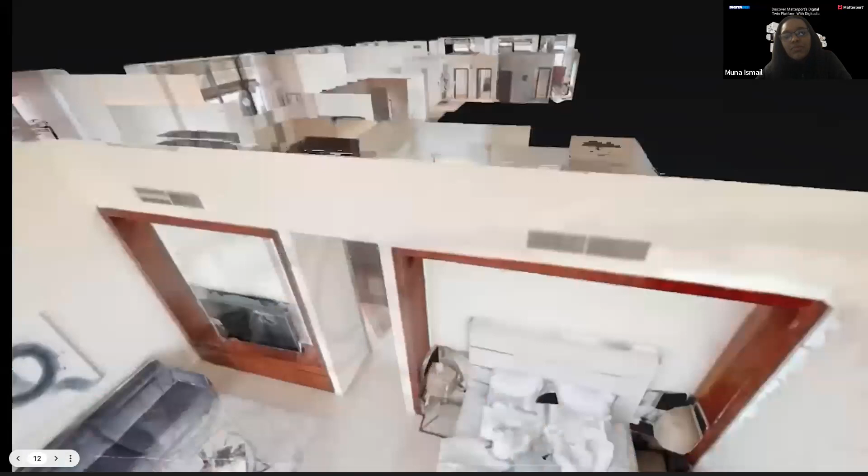Meet Matterport, the market-leading 3D platform that lets anyone turn a physical space into an immersive digital twin. Homes, offices, factories, shops, museums, schools, you name it. Scans are captured from any compatible camera, including the phone in your pocket. This recent innovation is only possible because of Matterport's huge data library. And behind it all is Cortex, our powerful AI and deep learning neural network that automatically stitches together images to construct dimensionally accurate 3D models.

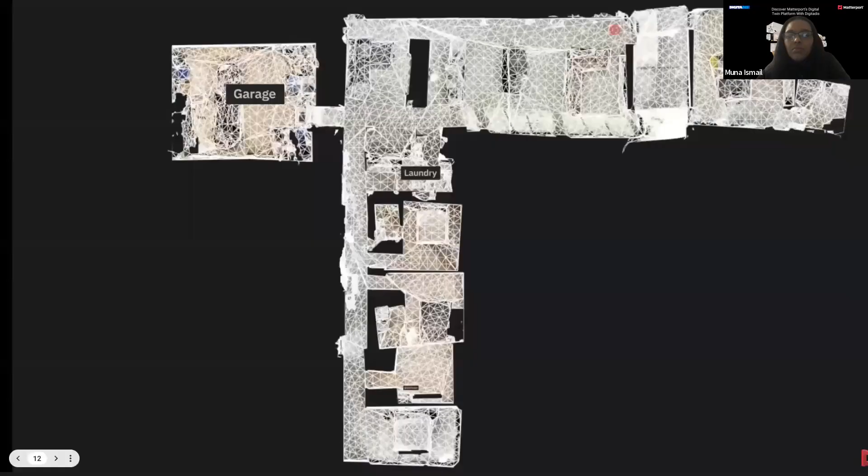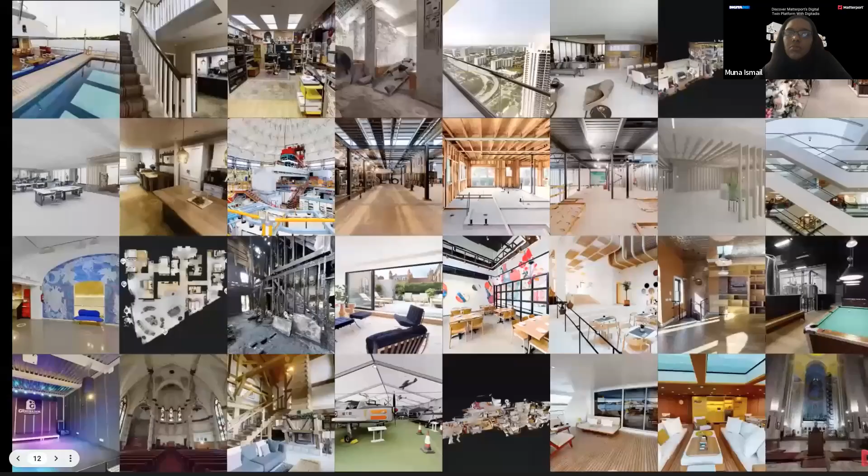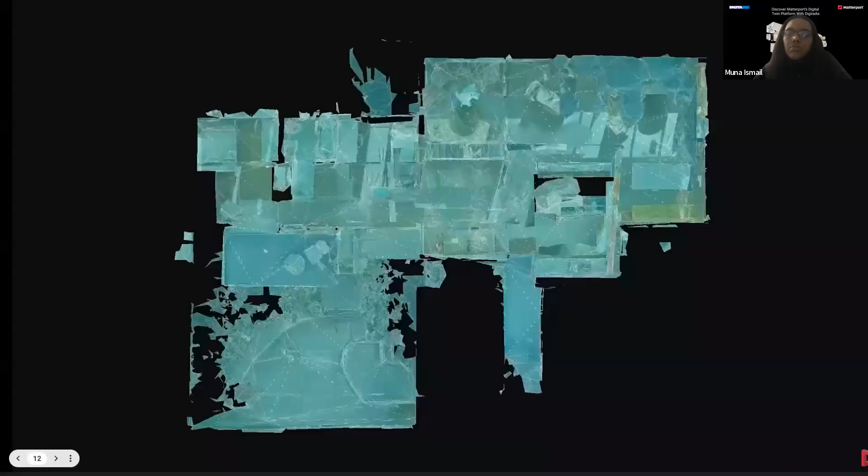Once a digital twin is created, it can be customized with Mattertags, labels, and guided tours, and easily shared with anyone on any device. They can virtually view, collaborate, and engage with 3D spaces. Thousands of companies in over 150 countries use Matterport and have realized unparalleled value. Millions of spaces of every kind have been captured, comprising billions of square feet and 3D data points, resulting in the largest spatial data library in the world. And it gets bigger every day, allowing customers across the property lifecycle to unlock unprecedented spatial data insights and analytics.

Matterport has been digitizing the built world for a decade. Now we're massively scaling towards achieving our mission of making every building and every space more valuable and accessible.

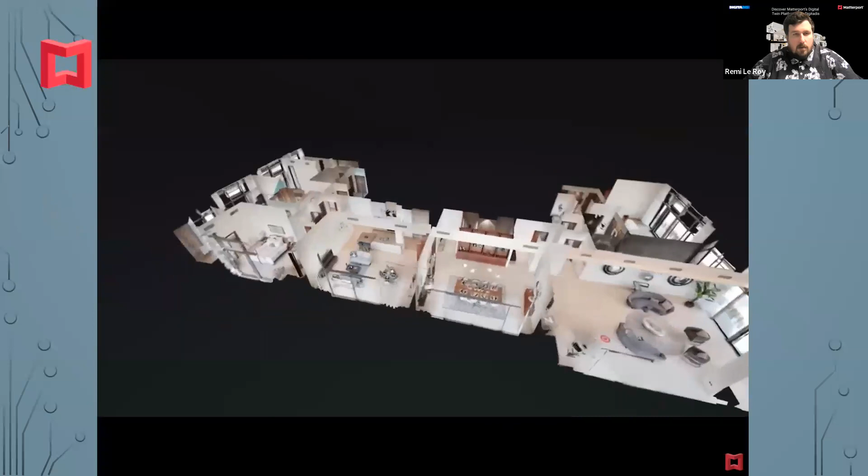Matterport lets anyone turn any space into a digital twin—an accurate and immersive 3D model that can be shared, measured, and customized by you or a team. This is the Matterport Pro 2 camera, the gold standard for professional 3D capture. First, place the camera on a tripod and press the on button in the back to turn your camera on. Use an iOS or Android device to take control of your camera. Go to Settings, Wi-Fi, and find your camera's Wi-Fi. To start scanning, use the Matterport Capture app. Press the Scan button to take your first scan point. You can turn around the camera or hide in another room to avoid appearing in the scan. The layout of the room you are scanning will appear on your tablet.

Just continue scanning, one scan point at a time. Move the camera every 2 to 3 meters after each scan point until you have the whole floor plan on your tablet. On average, it takes 20 to 30 minutes to scan 100 meters squared, depending on the nature of the space. When you have finished scanning, simply click on Upload, and we will take it from there.

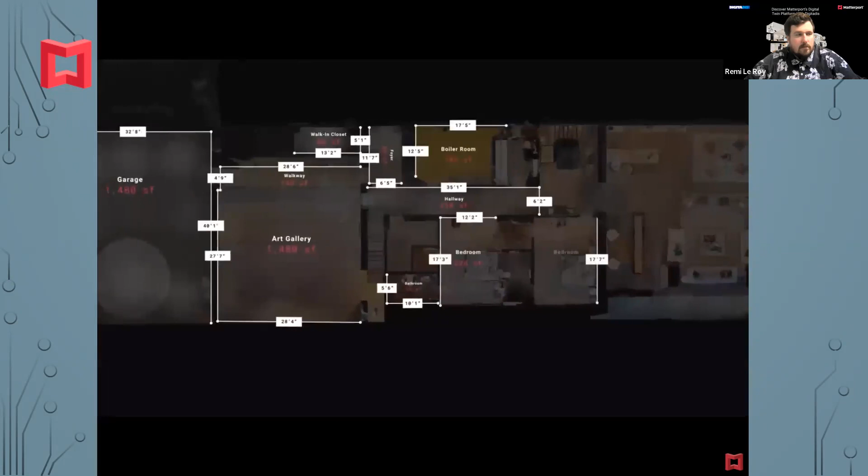Following your scan, we will create your digital twin, as well as HD photos, videos, and floor plans. From your Matterport account, you will be able to get the links to share your models, take extra pictures, download videos, add labels, add Mattertags, an easy way to enrich the model with photos, videos, documents. Take measurements of the floor plan or anything inside the model.

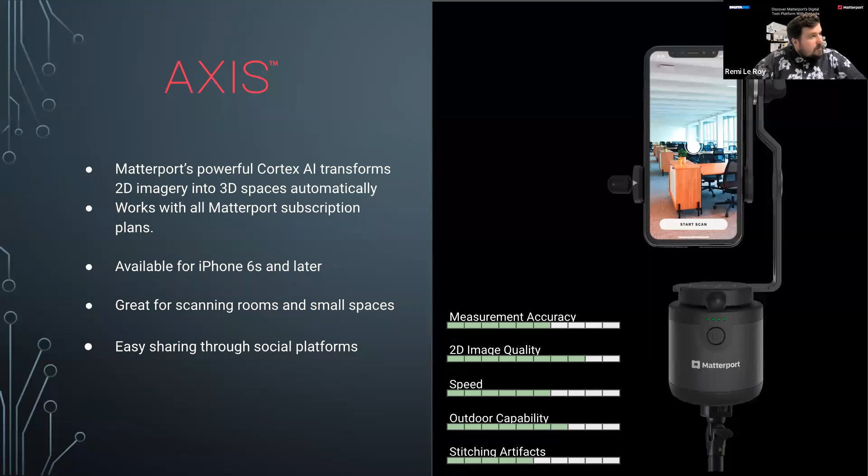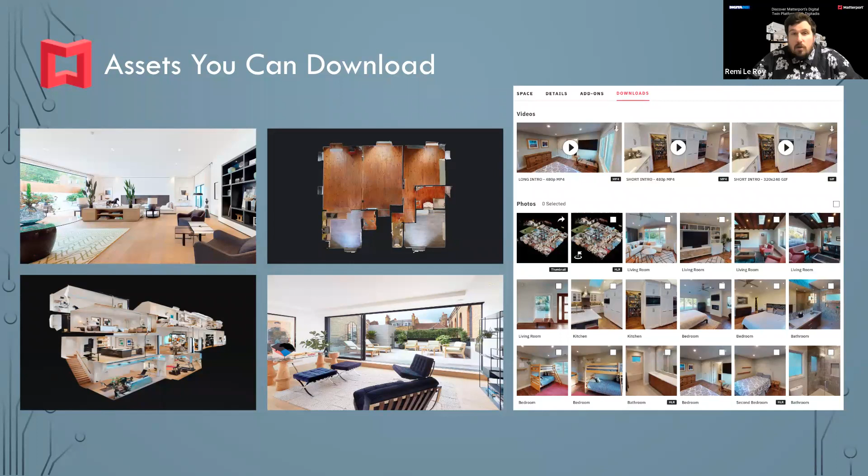In the construction companies as well, it's the same story. They tend to use lots of different tools, and Matterport is an all-in-one tool that offers so many advantages. So that's for the assets that they can download.

I was talking about videos as well, so it's another experience. Sometimes we talk a lot about digital twin and virtual tour, but there's nothing interesting in a digital twin or virtual tour if everything is deformed, if the visuals and volumes are not respected. If you don't feel like you're actually inside the building and don't understand how big a room is, there's not really a point in having a virtual tour of a space.

And this is the big difference with Matterport. This is the alliance of high definition visuals with very precise measurement taken by the camera, which allows us to create a digital twin where you feel like you're walking inside the model. You understand the way the volumes and the space are structured.

These are just examples of videos that you can get with Matterport. You have one that shows the dollhouse view, another that shows the virtual tour inside, and the entire experience is very interesting for the viewers. And then we have other tools like Notes.

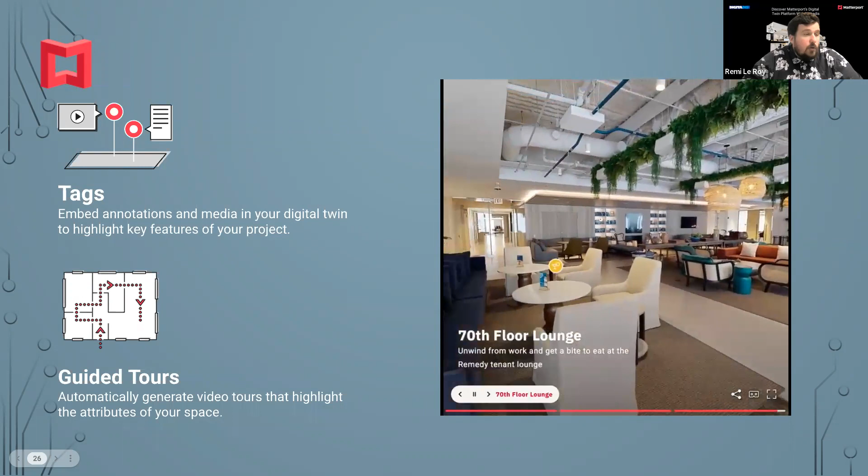We have tags as well, and guided tours. Mattertags are those little dots of color that you'll see. This first is the video of the guided tour - this is more of a marketing feature where you can add a title, show different pictures of the virtual tour, and you see those little colored dots in the video. Those are Mattertags - little dots that when you bring your mouse next to them, it opens a window, and in this window you can share information.

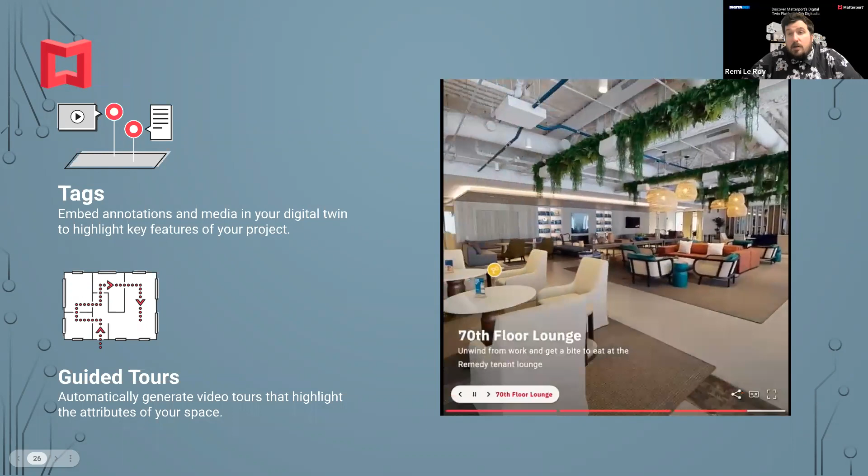You see them here on the video. You can share a lot of information - videos, text, documents, PDFs. So it allows you to enrich your Matterport model with lots of information. I encourage you to think about all the different industries where Matterport has a great impact, because you can add so much to a virtual tour, to a Matterport digital twin.

Then we have views. Views is a way to, with one single model, basically create different experiences. Let's imagine a hotel with different meeting rooms and spaces, and different teams in your organization - a team for maintenance, a team for customer service. You might want to use your virtual tour to promote your hotel online. So views allows you to have the same model but with different experiences - one for maintenance, one to promote to your customer. It saves you a lot of time and allows you to have different experiences on the same model.

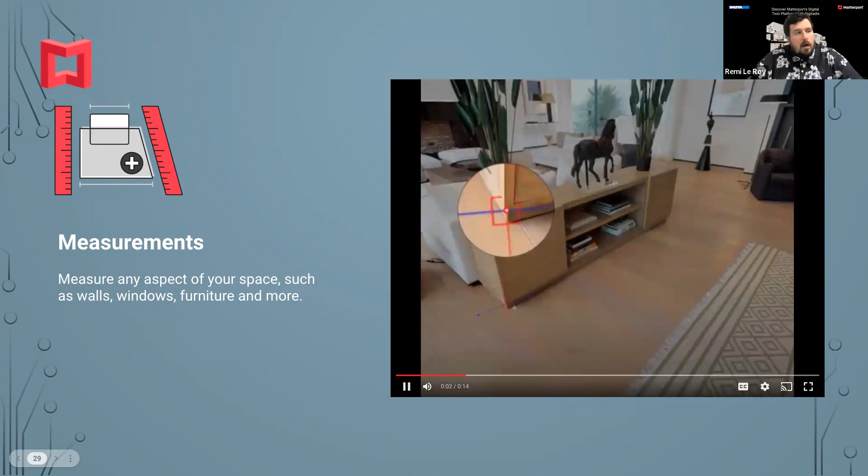Measurements - this is something that is obviously used in many different industries when we want to understand how big furniture is in a space. Is my sofa going to fit in the living room? Is my new fridge going to fit in this kitchen? Does this new server have enough space in this room? It's a great tool. The great thing with scanning with Matterport is that it allows you to have access to measurement information. But the most accurate measurements you're going to get are going to be with the bigger Matterport camera, the Pro 2 and the Pro 3. You will get a good idea with the smartphone and the 360 camera, but if you really are looking for precision, you're going to have to go with the Pro 2 minimum.

So everything I've just shown you here, all those elements, and there are many more tools that you can use - I invite you to get in touch with Digitado to learn more. All of those are part of the Matterport software. And you have other elements that we call add-ons, and those have an extra cost because they require a little bit of support to create.

You will also be able - so we've got the schematic floor plan, we've got what we call the MatterPak. The MatterPak is a set of files generated from the collected data that you get from the Pro 2 camera, and that allows you to include those files into a third-party design software. So we have a XYZ point cloud, we have an OBJ mesh, and we have the floor and ceiling plans. We also have an E57 and a BIM file.

So the floor plan looks like this. It's very straightforward - a black and white floor plan, and it allows you to very quickly have a floor plan design. Sometimes you don't want to spend hours doing it, you just want to have it ready. Well, it's possible with Matterport, and you have several options. You can ask for an express floor plan to have it in a very short time, or you can have it in 24 hours, depending on how fast you need the plans.

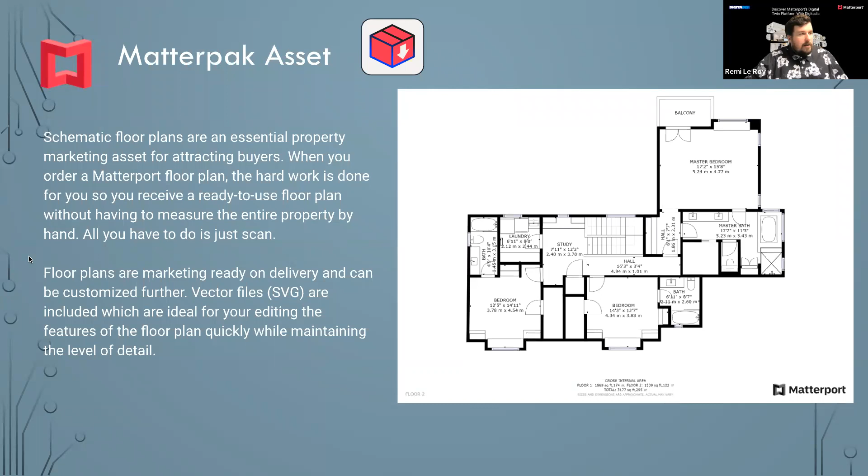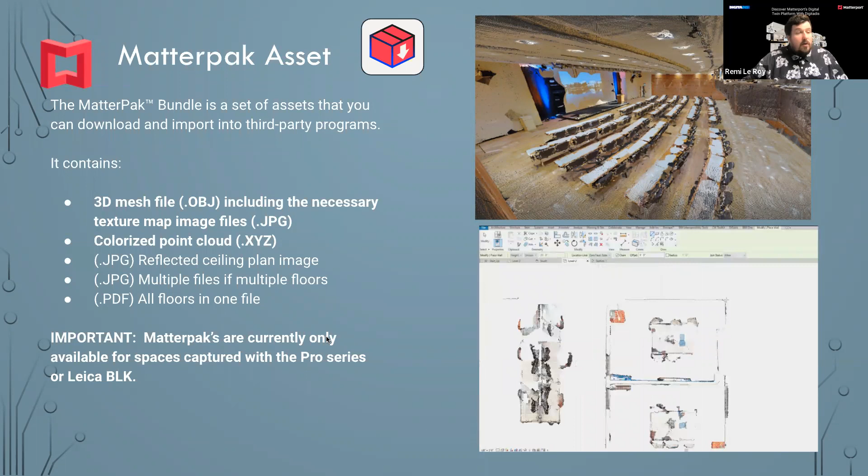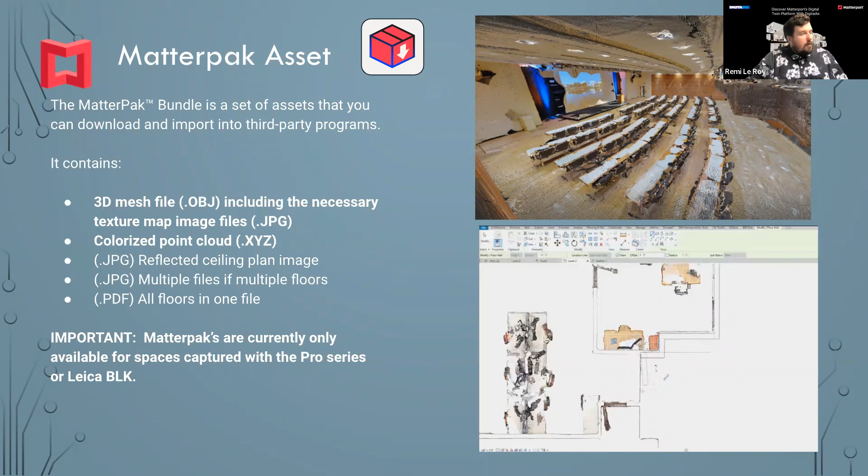The MatterPak, as I was saying, is a bundle of assets with lots of different elements that allow you to recreate the space in 3D for design purposes. So if you want to break a wall or add a window, you're going to be able to very quickly create a 3D space of the property that you scan, with lots of different elements that we saw earlier.

E57 - the E57 is an industry standard, so you will know what an E57 is.

So you can get that file downloaded straight away from your Matterport account.

So it depends on what you want to do with the model. The Matterpak was originally created to allow any type of computer to work with it. With the E57, you start with a lot of data - those files are heavy, so you do need a powerful computer to work with the E57. And then we have the BIM capabilities as well.

Depending on what you need - if you want to get an idea of the MEP, if you want the furniture as well, or if you want just the architecture base - we can recreate building elements for BIM very quickly. It's a huge save of time and money for all the different projects you're working on. So it's also a capability from Matterport.

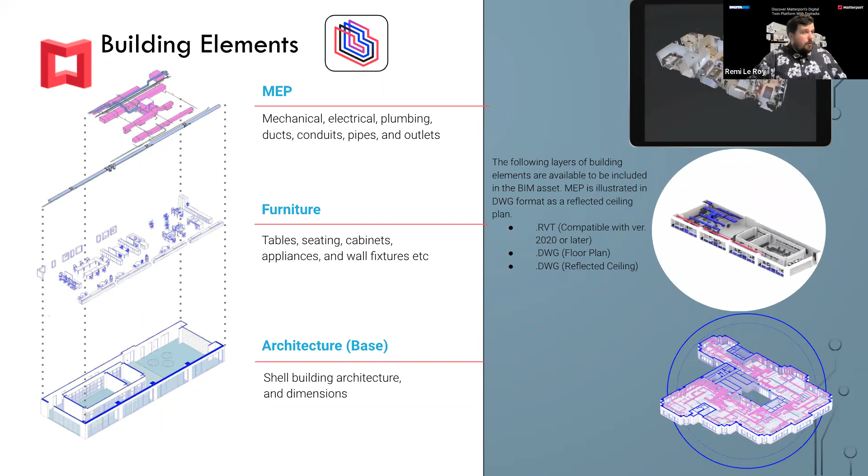And finally, I wanted to talk a little bit about the building life cycle, because as I said, Matterport started in real estate - there's no denying that. The idea was to help properties sell faster and show properties to more people in the world. But Matterport has become so much more now, and we have found a use case for it in all the different steps of the building life cycle.

So if we start with the building, we start with design. With Matterport, we're going to be able to capture the existing conditions and start designing the model based on that.

Then when we go where the construction is happening, with Matterport we're able to document and collaborate on the construction. We don't need to be on site all the time - we can very quickly and efficiently have a digital twin of the property being built, and collaborate on the different elements. So it's a great tool for construction companies.

Once that building is built, when it's time to promote it for different reasons - you might want to invite customers into your building, sell it, or rent it. So whether you're a restaurant, a hotel, a real estate agent, or a photographer, Matterport is a great way to promote a building, because you get this wow effect of the digital twin and dollhouse view, and incredible quality of images.